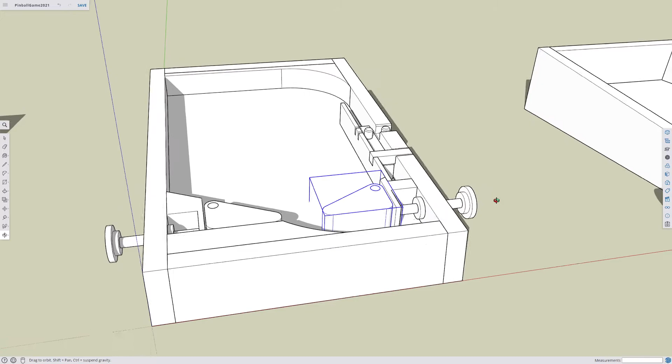You've started putting it together, but because we've got multiple projects, I haven't built this one yet. So I had a good look at it. I've had a little plan around the existing drawings and designs.

Now, my plan was to sort of spend the time to figure out a few dimensions and sizes and the best way to draw things, draw it up, then do it again, record it a second time, and it would be clearer and cleaner.

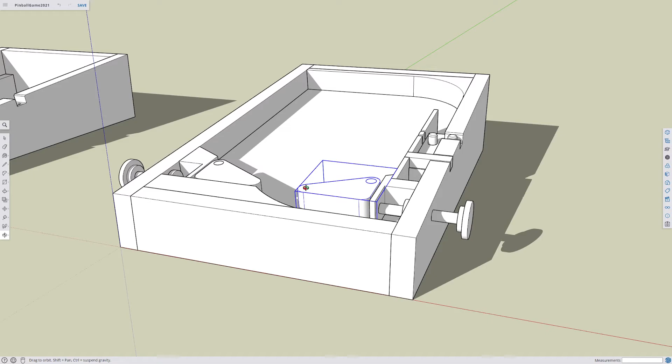But it is a difficult project to visualize because there's a lot of angles and a lot of things going on, moving parts. Now, you can have a go.

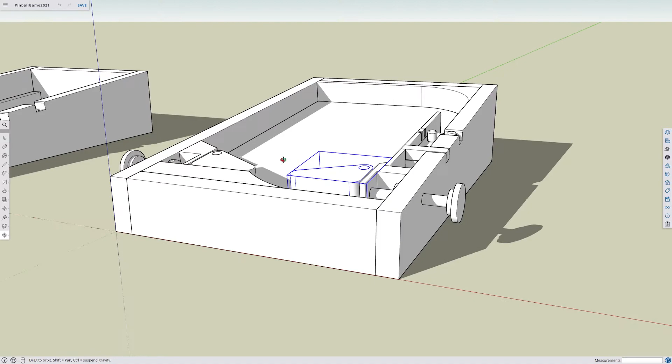That's not a problem, but at your level, just starting out with 3D design and CAD, I really think you may get very frustrated, and frustration leads to being a bit disheartened and put off from doing it. So I think you just need a little bit longer before you get there.

However, that doesn't stop us having a little bit of a talk about the design and you having your design input. I'm just going to give you mine, where I'm sitting, and I'm looking at it from what you've already done to what you need to do and how it will work.

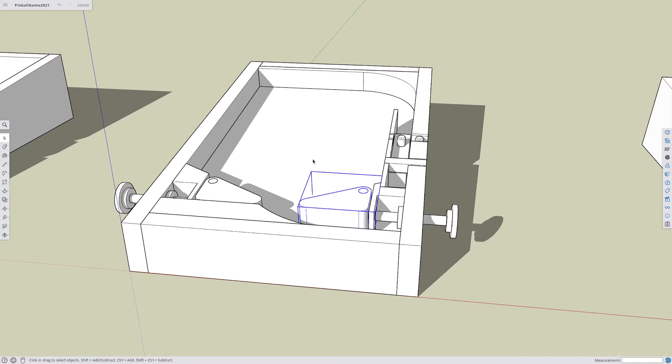Okay, so I'm thinking about the dimensions and how it will work and materials we've got and how I would put it together as best I can.

Okay, now let's go over it. Here's my sort of final design. Got our flippers, are the same as what you've already cut.

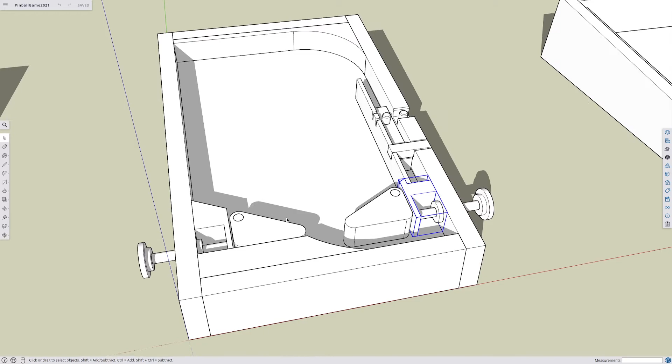Those little pieces on the side that you've already cut this one. This one may need some modification. And then I've figured out a way for me to shoot the ball up into the game.

So let's go through it a little bit. I'll try to go over everything I've learnt and what I've come up with.

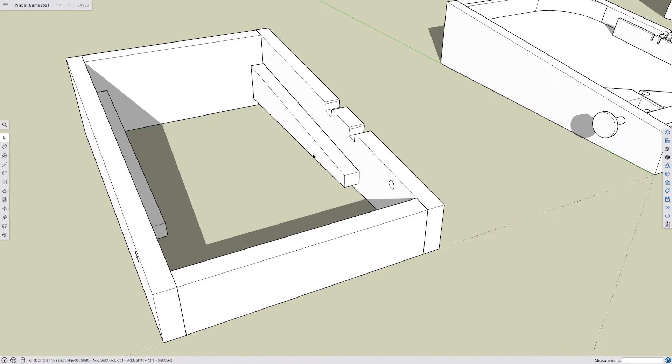Okay, most of you have a frame like this. The holes, I'm assuming you've put the holes in there. So go through it.

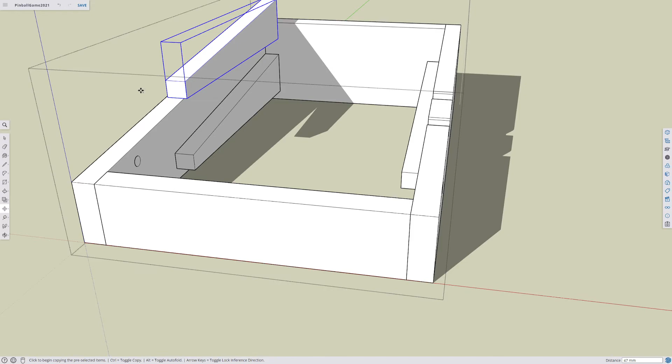These are the dimensions you have. This piece here is the offcut for up the top. I'll flip that over, flip along green, flip along blue.

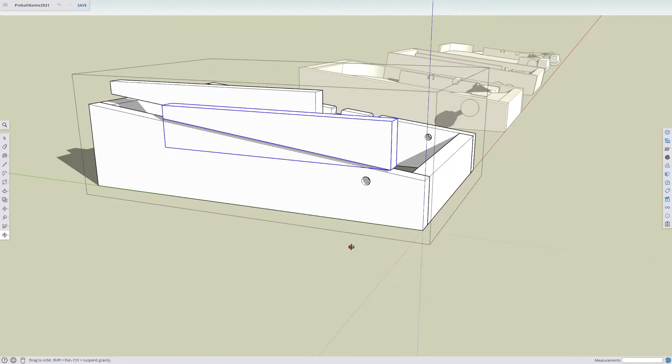Okay, so this is that piece there, the offcut. Okay, so that is the piece I cut off the top, and you cut off.

You brought it to the teacher, put on the bandsaw, probably put on the bandsaw, and cut to the waste side, this side, and gave you that second piece.

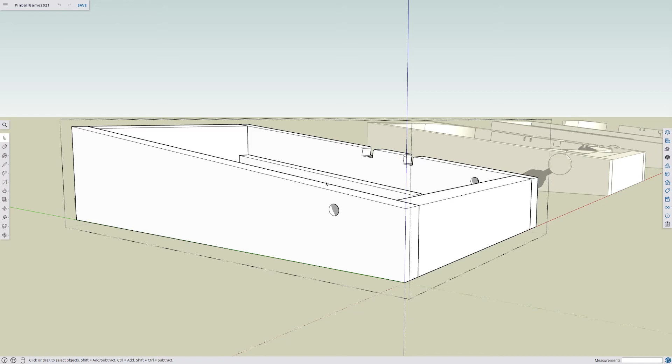Now, once you desanded that up, marked it all out, my idea would be to take that, if you haven't already, and to glue and tack it on to the inside.

Make sure there's a left and a right. I have gone up a little bit off the bottom. So if you want to know how far, I'll measure it.

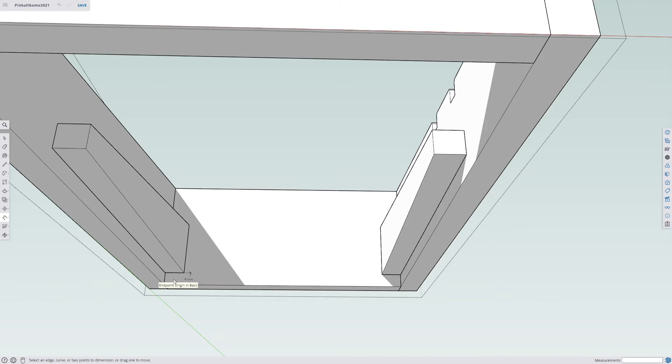I brought it up 8 millimeters. Now, that won't be the overall because yours, they could all end up different sizes.

So if I come here, you should be about 27 from the top edge.

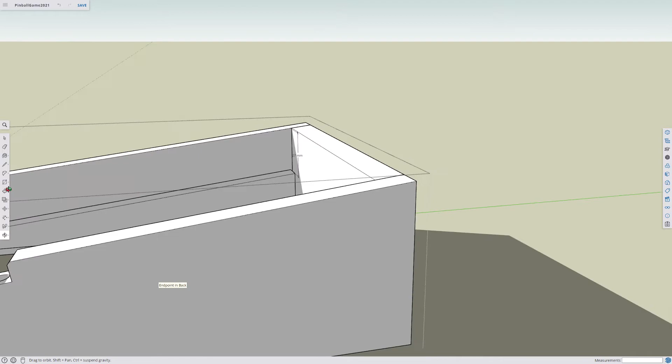The reason is because I've got 8 mil plywood and then the rest of my pieces are 19 mil, and I've done it so they're all flush at the top, you'll see. So depending on your thickness of plywood will change this variable.

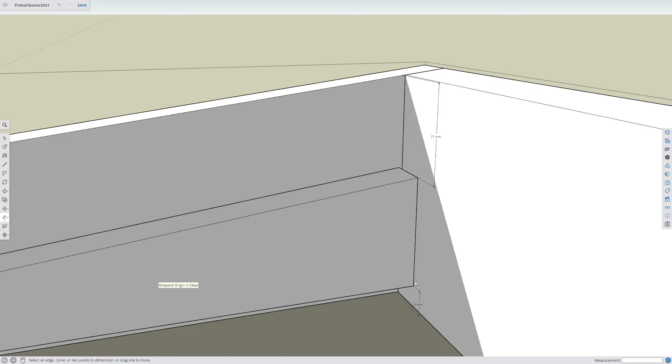Okay, which would obviously this will change depending on where you've desanded to and that type of thing. Okay, so you pretty much need to think about this edge here going to that edge here. I wanted to leave some room at the bottom, and you'll see why.

Mechanisms, okay, for things I have underneath. I've also left from the side, from the front edge, go along from here.

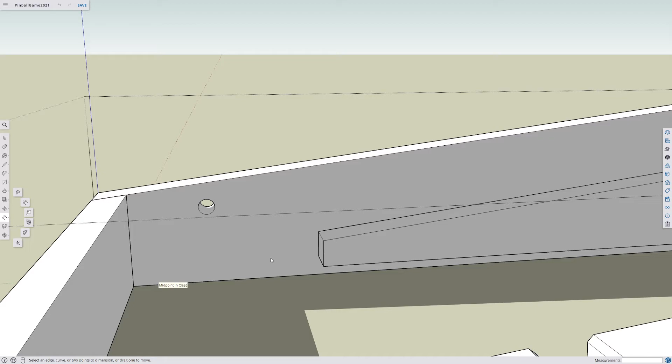Try to get it on. In there, but 70 millimeters, okay? And I'll explain why I've done that.

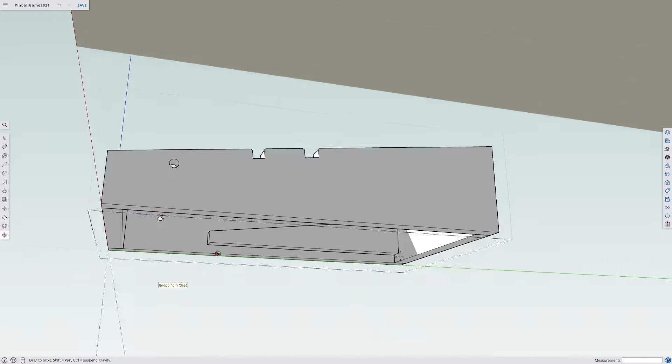So let's have a look. There's my finished model. We were just looking at the frame. There's a couple of little things here.

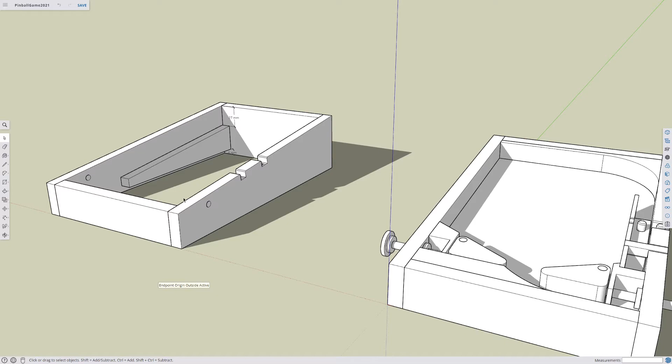Okay, the holes, I would imagine you would need to cut the holes or bore the holes before assembly. If you do it after, it's going to be hard, hard to line everything up.

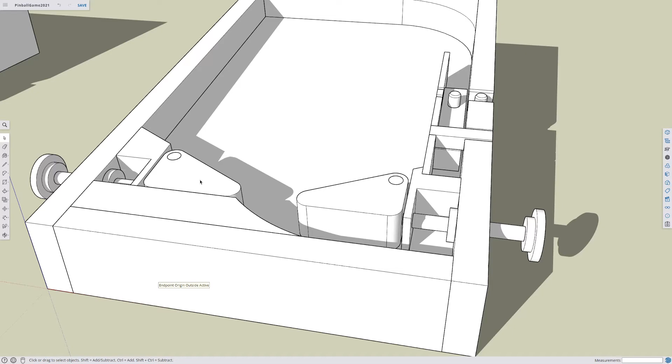Now, I've also got these little sort of cuts in the top edge going perpendicular from the top down. Now let's go through why. The flippers I drew are the same size as what you have made.

When I push my plunger in, I've got this little stop. I've drawn these as 3 separate pieces. I would think that would be a bit of plywood. This could be 2 bits of plywood, or perhaps 3D printed.

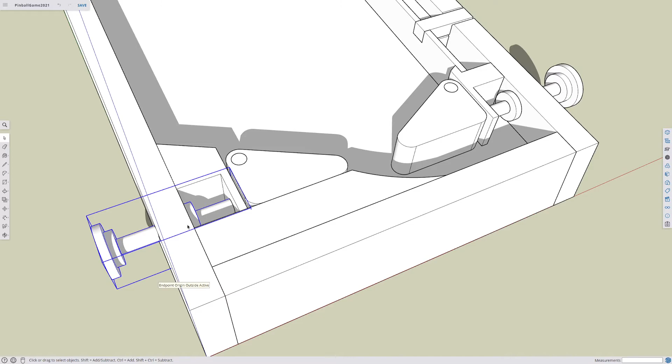So I'm going to take that and plunge it in. I'm going to press it in, take it from this edge here, and so it pushes in like that.

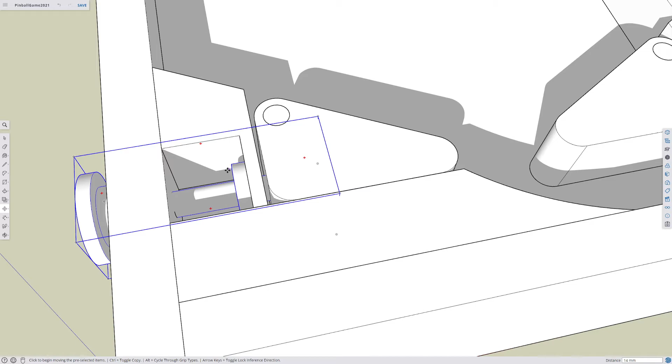It'll hit that there. Now that's why during the previous weeks I talked to you about the grain direction. Because as that comes in, although it's going to stop here, there's a chance if your grain is running this way that it will just snap. That will be kind of challenging for you.

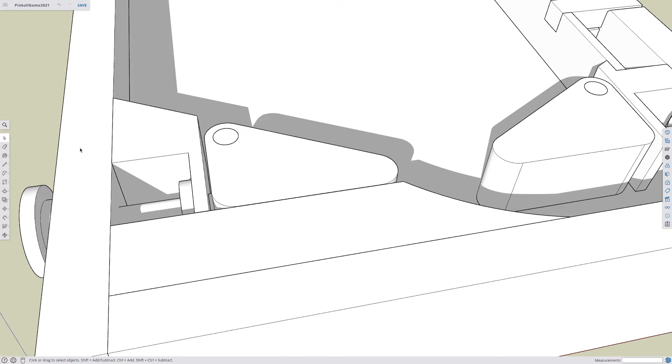Most people I told about grain direction, that the grain should be running lengthways, said yes, that makes sense. There were 1 or 2 people that said, nah, not an issue. Honestly, I think it will be an issue. Before you glue it on, before you attach it, give it a thought.

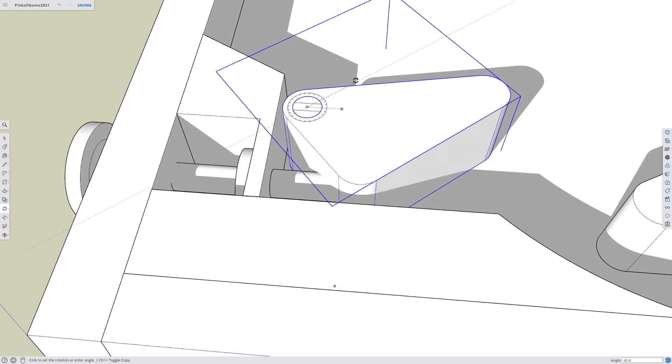That plunger will push in along here, which will push against this edge. So I've got this all grouped together. I'm going to come up here, and that'll bring it out to there, which is 40 degrees, which works out quite well.

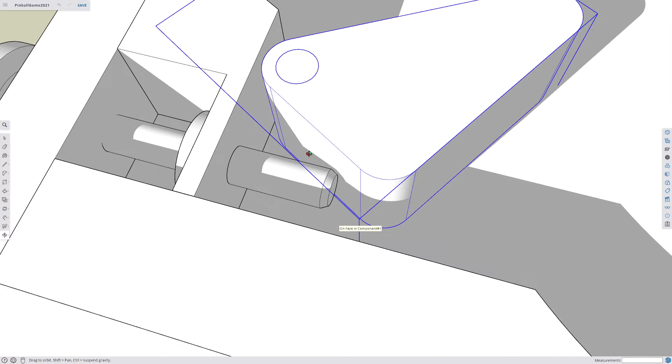So I've got a little chamfer taper on the end of the dowel to push evenly. It could be smooth. Do that with the disc sander or just hand sandpaper. So it pushes in, pushing this piece along that edge at 40 degrees.

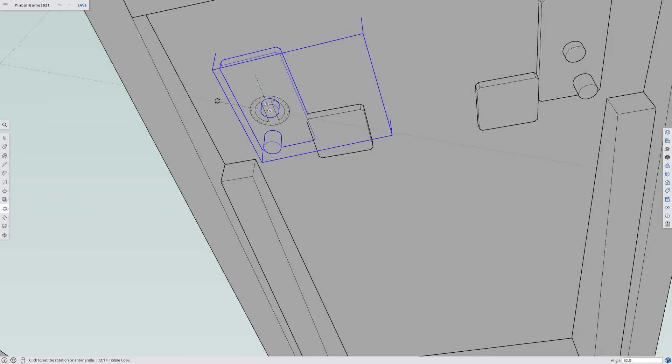If I go underneath, you'll see my mechanism. Now I'll rotate this back to where it was. See down the bottom, 60 degrees.

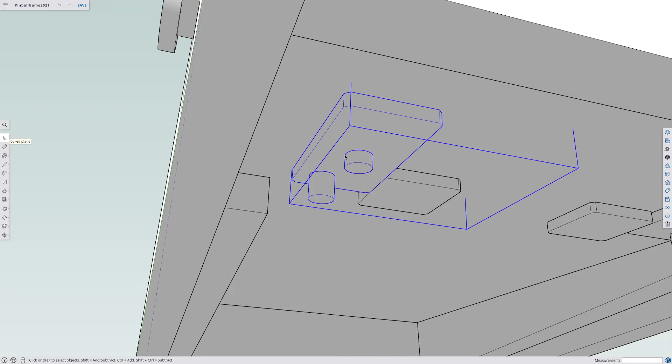Got these plates, cut them out of plywood or acrylic, maybe even 3D print. And they're glued - well, I say glued, but I think nailed through the side might be better if we can do it. But we'll work that out. At the moment, let's say they're glued.

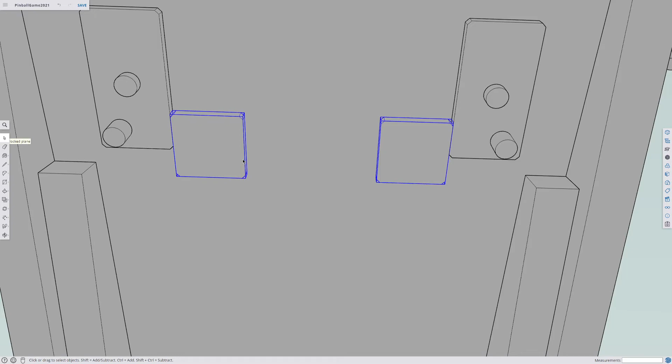There's a secondary piece of dowel in here and 2 flat pieces of timber. Obviously these need to be fairly accurately glued and tacked in place on the bottom of the plywood. I imagine a rubber band around these 2, which will bring that flipper back into the resting place. On the left-hand side you have this end piece here where the ball will roll down into this chamber.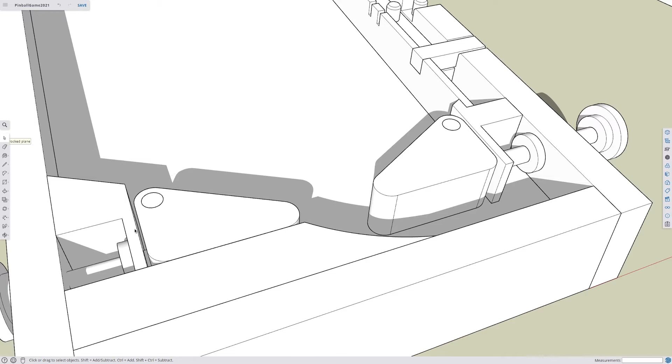Now that will prevent that one going back, and to some degree so would this, but I've given it a bit of clearance here, 1 millimeter clearance. The other side doesn't have that benefit. The rubber band on my original design, if you watch it, is up here and attached to the side.

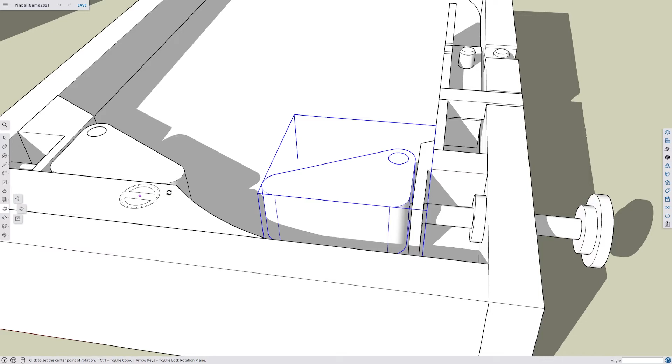To pull it back in. That makes no sense on the right hand side because that will come back to this. Now these are things you may want to redesign - that is not a problem. That would come back that way, and hit on this edge here, which may not be a big problem and may be a simpler solution than those.

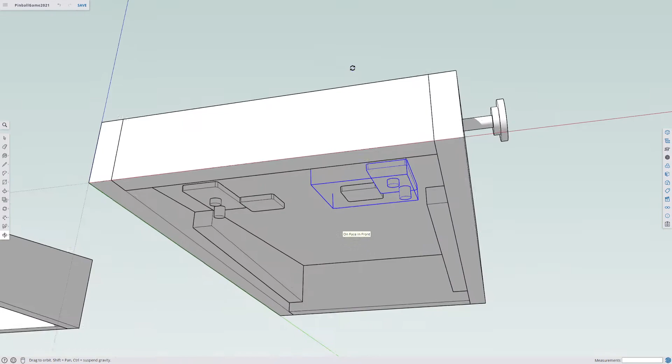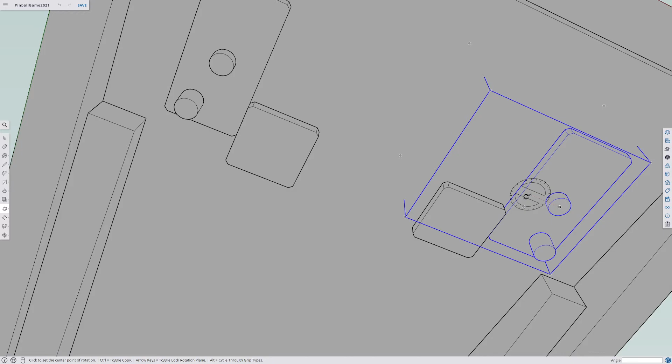But if we're accurate, if we measure in and we've drawn it up on CAD, we should know where they go. They obviously can't be up here, because when that end comes in, they need clearance. So they can't be up here. They have to be below, I would say, that center there. And also when I'm turning that, you can see why.

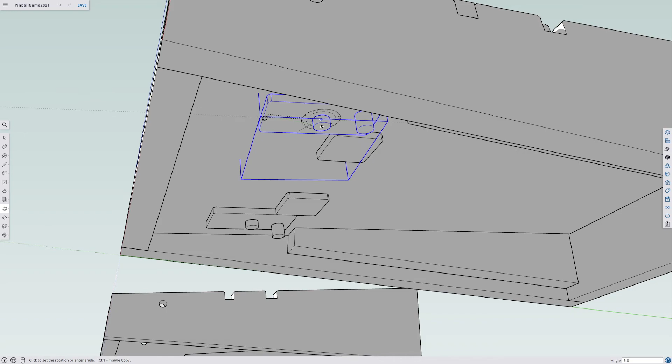Because he's on an angle, I need to get it on. See why I need to have that cleat cut short.

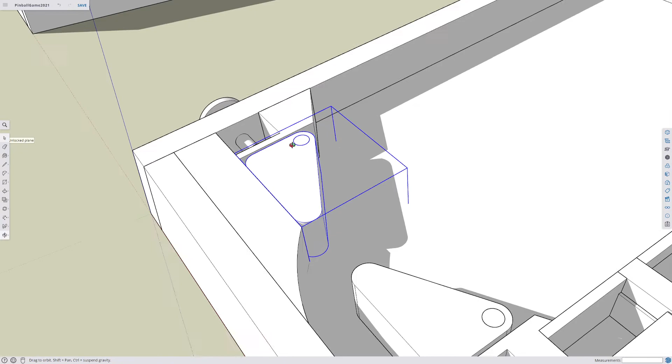That's 70 mil that we spoke about. So we've got our pins working. There's no glue under the face of it, obviously, and it should be done very clean. Perhaps even - no, it should be glued there, tight there, a bit loose on the base.

Now my plunger or my shooting thingy, whatever, I've done like this. Simple bit of 12 mil material, roughly about 12 by 12. A little bit of plywood here, some trenches cut in.

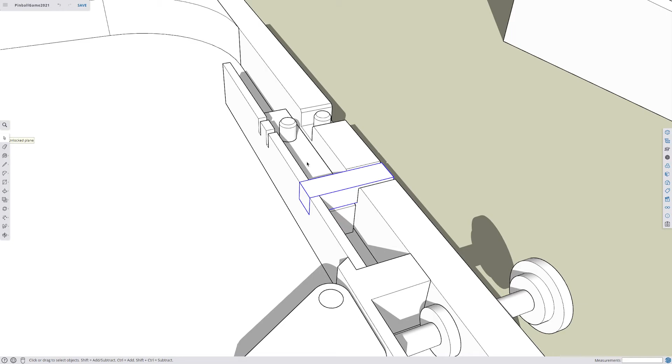That piece will hold it down flat, I hope. It may need to be wider. Actually, when I think about it, may need to be wider, but we'll see if it works.

A rubber band around here. Got two dowels there lined up and a little cut there, so tied around there or an O-ring or something like that. Then I pull this dowel back, go from move, pull it back like that.

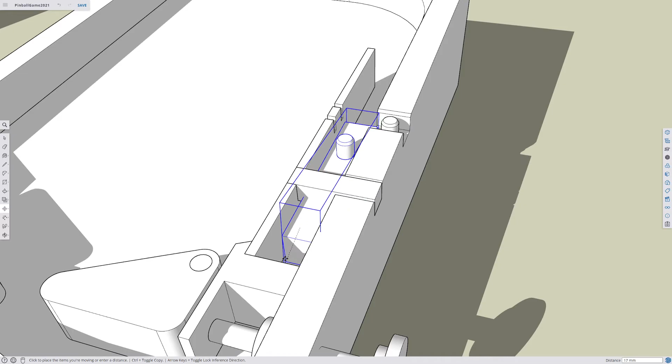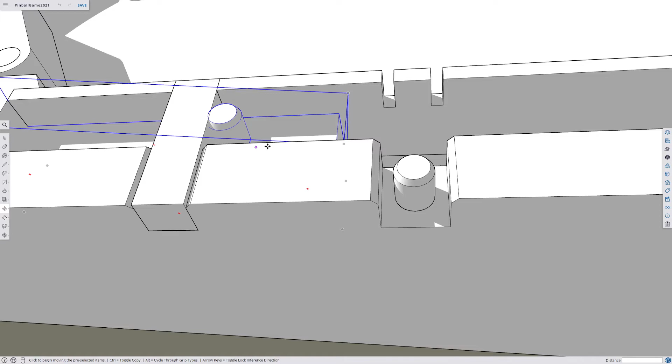Pull it back. Go along this edge. Well, it can't go any further, so it'll hit roughly there, and the rubber band will be stretching down around there. And then it will shoot

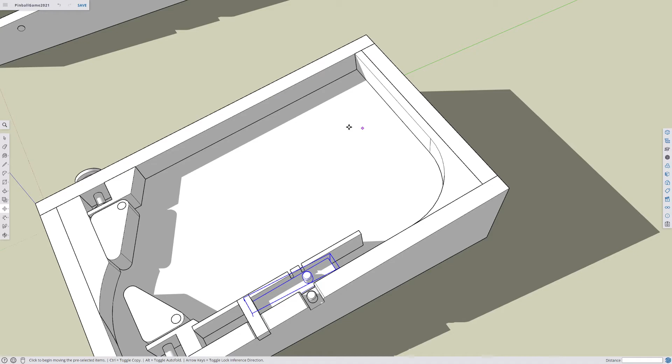Back this way, and it shouldn't go much past there because of the rubber band or the O-ring. The ball will then go around here and into your game, which you'll design. You should have maybe some spinning bits and pieces, maybe a little bell. So that gets rid of that problem where if the plunger was here, it'd be hitting that little toggle stick thingy. And here we go.

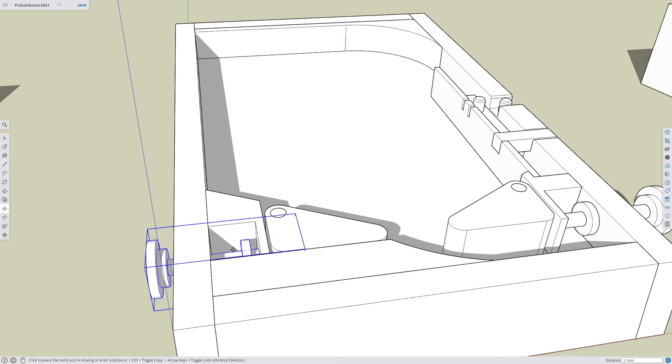I'll take that one back out. Red. So the rubber band underneath should pull them back into this position. That pin should push them out when we need to flip the ball back into the game.

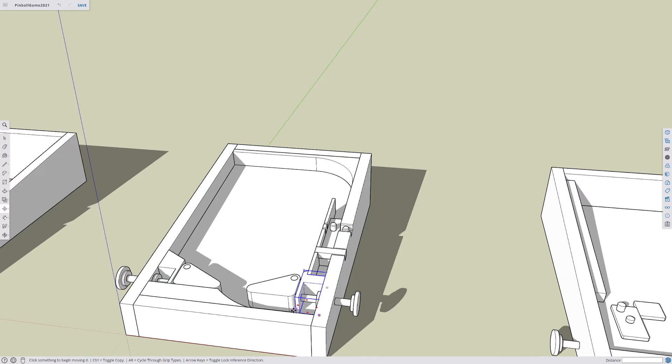This little slider should shoot the ball into the game. And then when you get out, they come down here, 3 balls, whatever you're going to have on your game. This was the assembly flipped upside down so you can see it.

And there it is without the frame, if that helps you look at it. And here is the base.

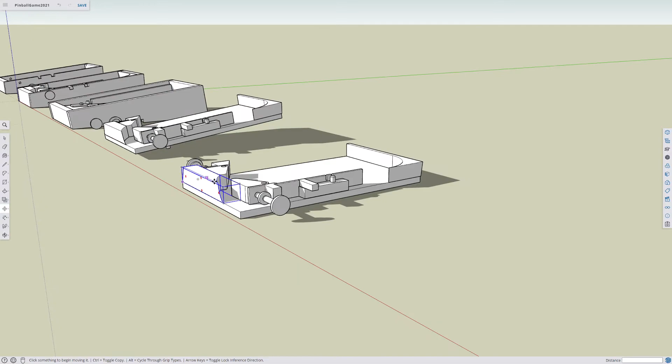This is how I would have preferred to make the assembly and then drop it in and then put these in obviously after and attach this secondary. But most of you have put the frame together because that's what the instructions said.

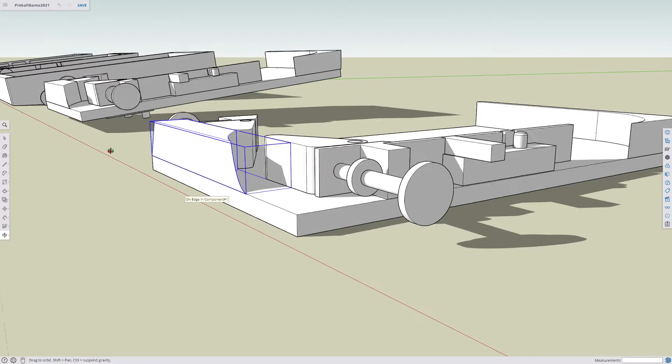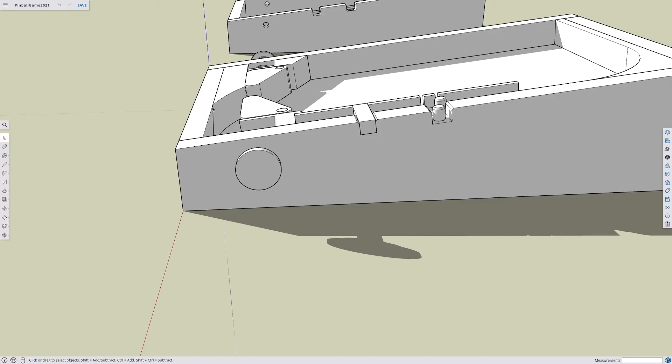You will have trouble getting these pieces in because they need to be planed or sanded to an angle, the angle of the unit here. So over here there's an angle, and you'll need to do that. A lot of you are rushing to get all the pieces glued in, everything glued and attached, and I think that will be a fiddly bit to do.

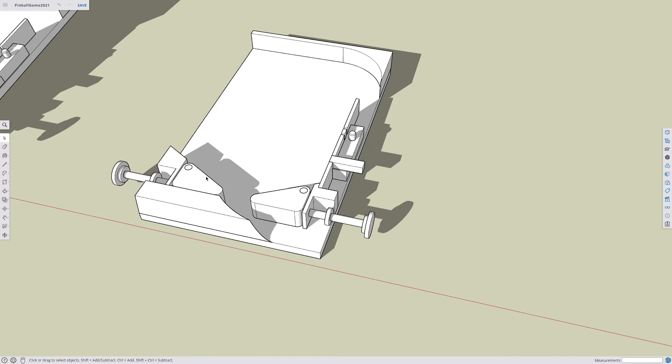But it's done now. You'll have to work on a solution. Other than that, I think we're pretty right for the design.

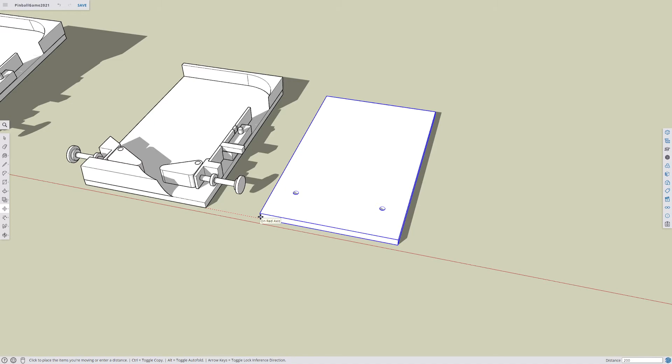I'm just going to move this over here. What I'll do is I'll put that there and then I'll move it away. Equal amounts, so I've got those holes. Let's have a look where they are.

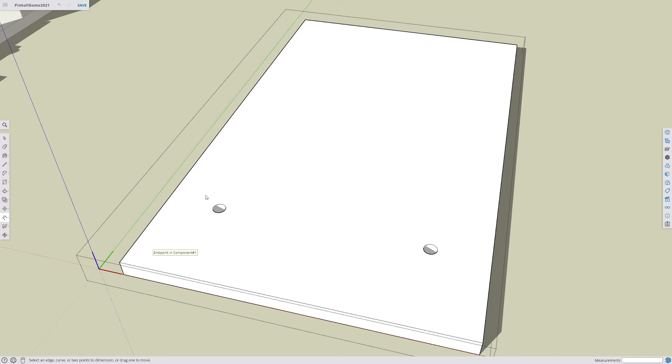Might have to go into the edit mode. What I'll do is I will turn on hidden geometry. Have a look, as you remember, that our holes aren't really whole. So let's do that again.

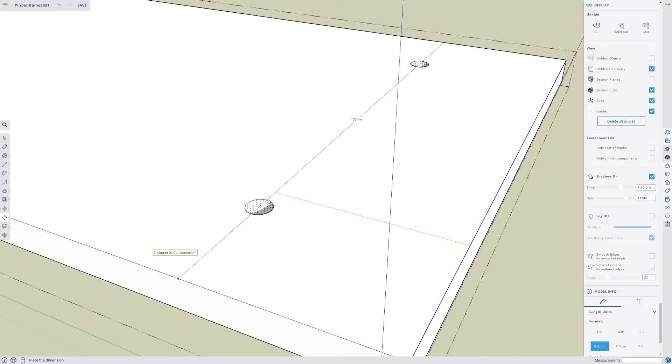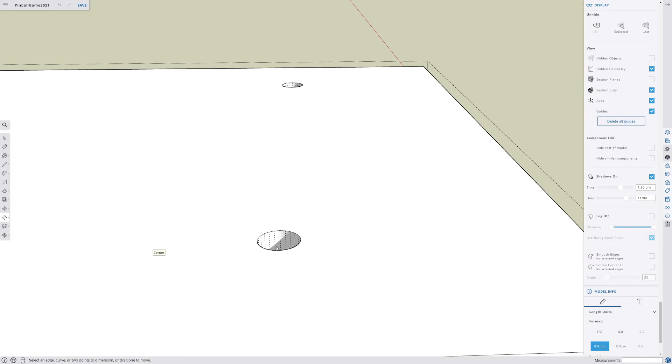I'm going to put a tape measure from here and measure out to put a line in here. There's the middle point. If I can come over - middle point here, center. Okay, that'll give us a good idea.

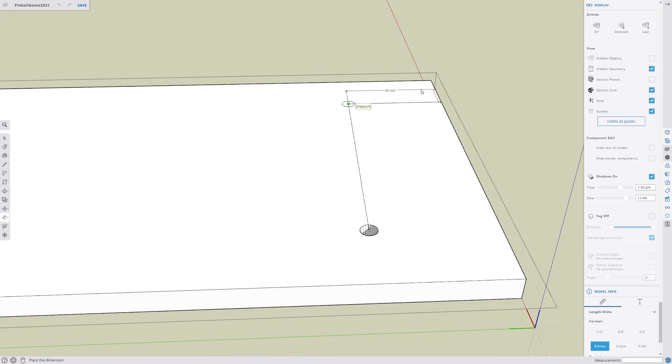So from here... oh, that's no good. There, there. So we got 43 mil by 26 millimeters, okay. I'm going to delete that, delete that.

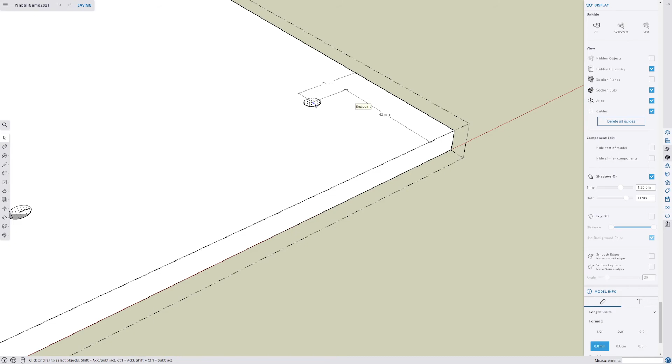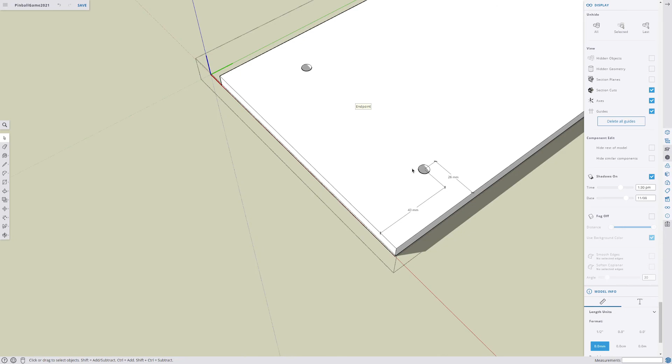These should both be the same. We've got 43 in and 26 across from each end. See that there.

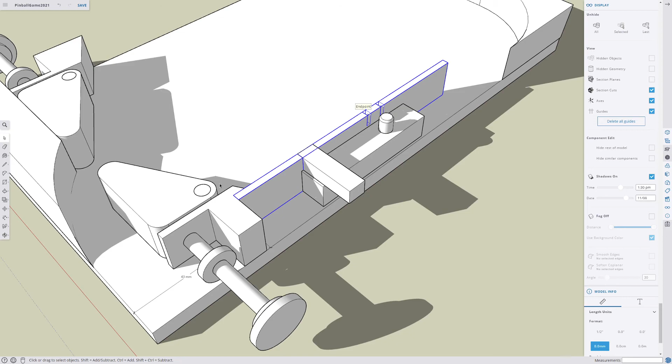This piece here, the things I haven't spoken about - that piece there is around 120 mil long, a bit of plywood cut to 19 mil wide. And then I took this piece here and cut it down. Now, obviously, the same way you did here, you just cut down with a tenon saw that way, and it should work out fine. Marking out is going to be critical on this job.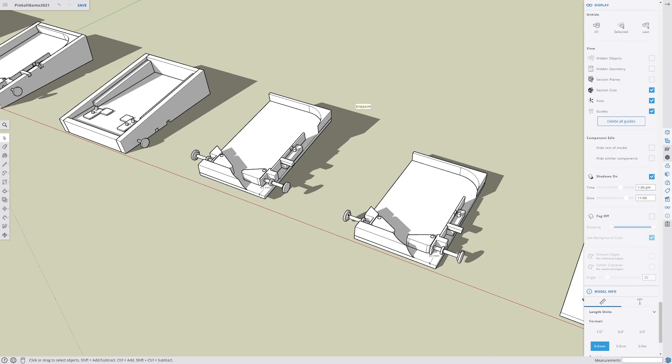Pretty much everything you need to know in there. Take this 3D model and perhaps start planning out how you're going to do the inside. See how you go. And then I want you to put in your folio how some of the pieces work.

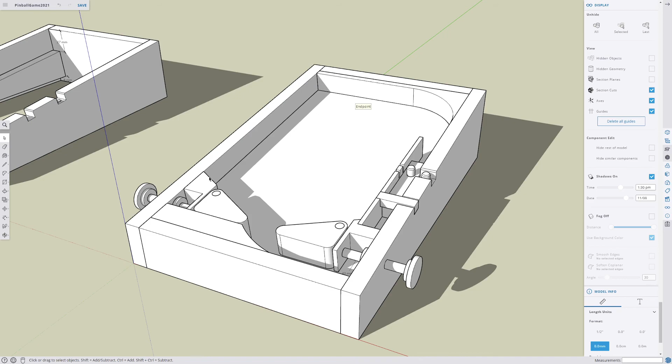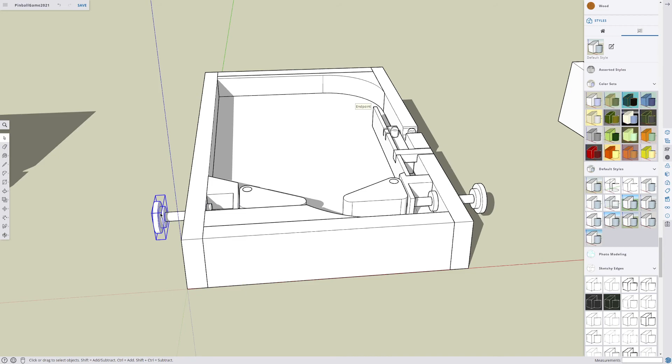If you want to edit anything, you understand that everything I've made is either a component, or some pieces have been grouped together. So to ungroup it, if you wanted to pull this off and have a look, you've got to right click, explode, and you can see now it's 3 components glued together. And then you could move it out and have a look.

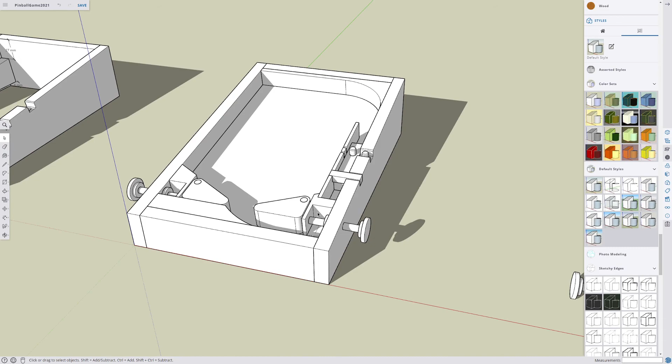And take some screenshots, let's put in the folio. And yeah, that's what I came up with. Maybe you can improve on this. Maybe you've got a good idea for here. Maybe you want to bring the backboard up. I'm happy for you to have a go. It was a complex model to do.